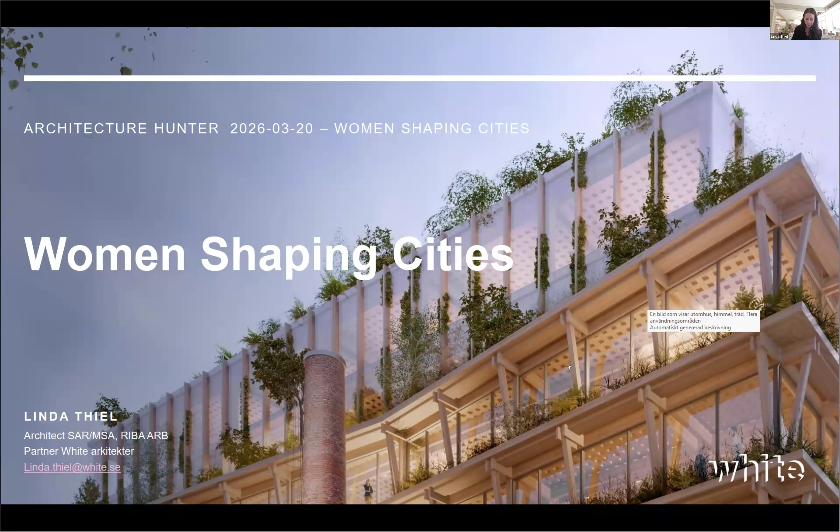So, as you already said, I'm Linda Thiel. I'm with White Architecture. I've been working as an architect for almost 25 plus years. I'll be talking a little bit about the Scandinavian approach to shaping cities through sustainable strategies, and how we can rethink urban neighborhoods and community-focused design. This will be through my lens as a woman and a mother. I'm of Swedish background.

I will come to some specific projects as well, but I'll start by introducing White Architecture. Our company was founded 75 years ago, and it's been spearheaded by community involvement and collaboration. Sidney White, who founded the company back in 1951, had the aim to improve society through architecture, and his legacy really lives through our ambition, taking that forward.

We are an employee-owned company with about 450 to 600 employees. The employee ownership really enables us to focus on collaboration and on how we see our profit should be spent. We do a lot of practice-based research through development and through our projects, and over the past 10 years, more than 300 employees have been involved across the whole spectrum, from curious beginners in research to fully fledged researchers. I think that really brings something to our practice as a whole and also boosts our projects.

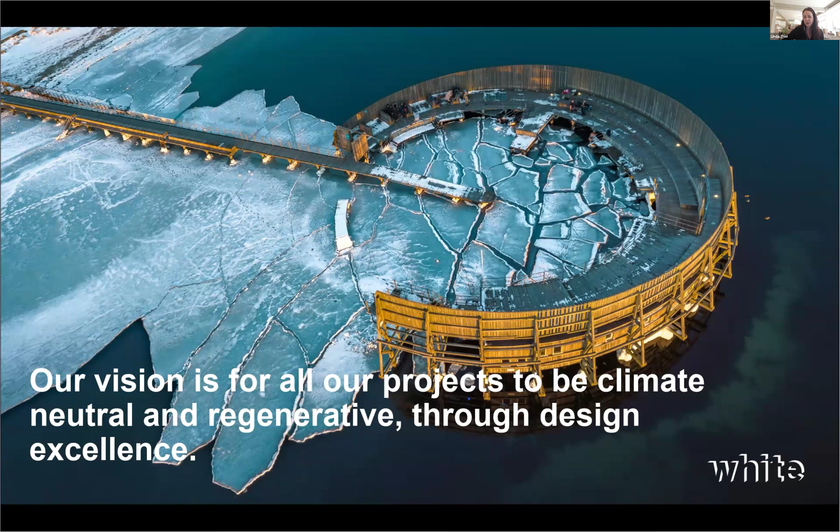I'm showing this image of a sea bath that a colleague of mine designed many years ago outside of Copenhagen, and it's a photo from this winter. It shows not only the closeness and access to nature that we're born with in Scandinavia, but also the challenges and the harshness of the climate that we're dealing with. That is something we have to acknowledge when we're designing, and I think it also impacts the way we live and how we actually share space.

So, design impact in relation to nature. 70% of Sweden's area is actually forest. We're kind of embraced with nature most of the time, and I think that also plays a role in how our cities have developed and how they're designed.

We also have what's called freedom to roam, which means the general public have the freedom to roam freely across nature and even past private land, as long as you keep away from the main buildings. Obviously you can't do whatever you want when you walk through the forest, but it's building on respect for both the forest and for the whole society and the people that we meet and that we work with.

So the last 10, 15 years, we've been working a lot with timber design across the company. This is due to circularity and biodiversity, but we also need to consider forestry. These are some images from last year's Biennale, when we had an exhibition on the fact that we do have a responsibility beyond the building site.

I'm not sure whether my toolboxes here are covering anything, but I'm sure it's fine.

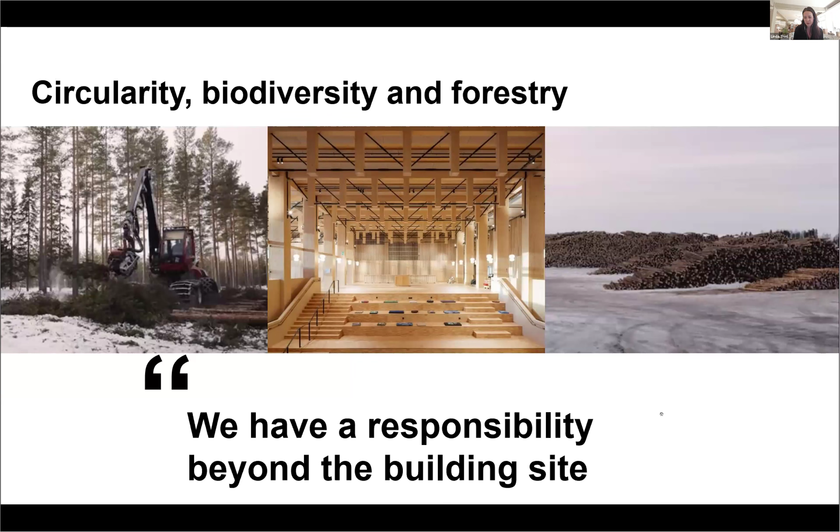The aspect of using timber is obviously good from a climate or carbon footprint point of view, but we also need to make sure that we manage our forestry accordingly so that we don't do any harm.

One thing that I work with a lot, and we do across the company, is rethinking urban neighborhoods. Not necessarily rethinking from scratch, but constantly evolving with society and culture, considering the context in different regions that we're working in.

We see this as reshaping cities or places where we can create healthier and more connected communities. This has an aspect on how we treat our shared spaces in terms of public realm, the thresholds between public and private, and also whether the buildings are the backdrop for public life to take place, rather than designing them as the key personalities in a neighborhood—which some of them obviously can be, and probably should be—but the main aspect of our societies and the way we live and relate to other people is in the public scenario.

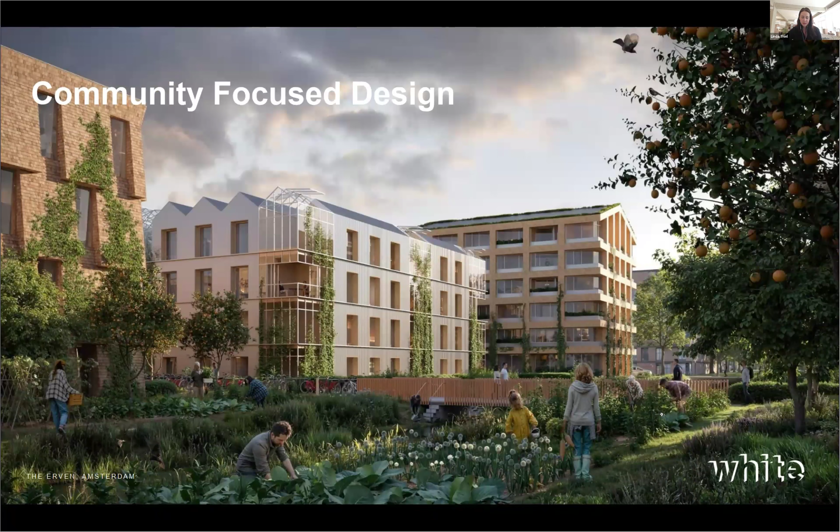In terms of community-focused design, this is an example from a competition we just won in the Netherlands, where how nature can actually benefit the community, and access to nature, if that is possible. Across Scandinavia and the Nordics, we're almost placing buildings in a humble way into nature, whereas in some regions we might need to create nature to be close to where we live and spend our time. This is also becoming more important in terms of managing both urban heat islands and stormwater, as the climate gets more volatile.

Do I take questions now, or do I just carry on and then we take questions after? You can carry on and then we'll do the questions when you're done with the presentation.

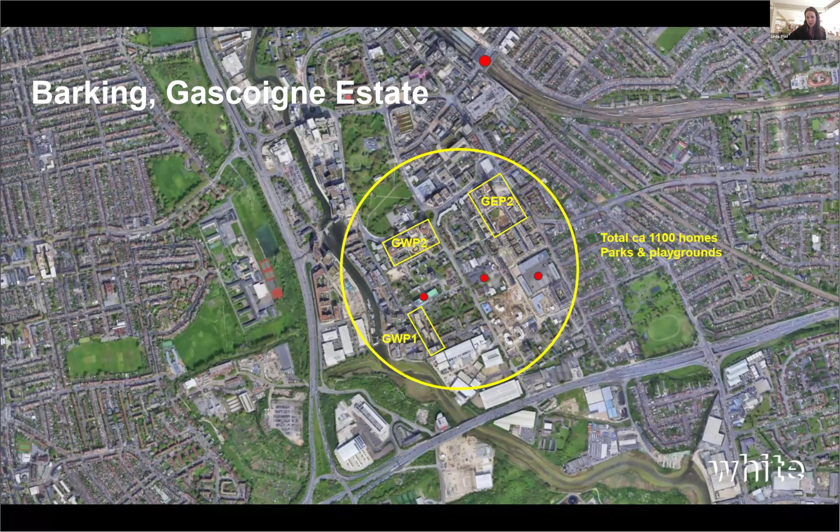So when I first came to Barking in 2018, this was the state of the place. It's an original 1960s estate with 12-story towers and 3-story linear apartment blocks. It was very open and difficult to navigate between buildings, with not many straight sight lines. As you can see, it was a lot of open space, but it wasn't very green.

The parts that were green were basic lawns, always fenced off and not much used. Even though everything felt very exposed with potential eyes on the street, it didn't feel very safe because it was difficult to navigate. There were long distances between smaller shops that could have felt like safe havens.

So our approach was to fundamentally rethink the whole landscape and public realm approach. Another thing worth highlighting is that Barking, and specifically Gascoigne Estate, measured across London, has some of the lowest life expectancies, health problems across the community, some of the lowest incomes, very high unemployment, and a very long waiting list for social housing.

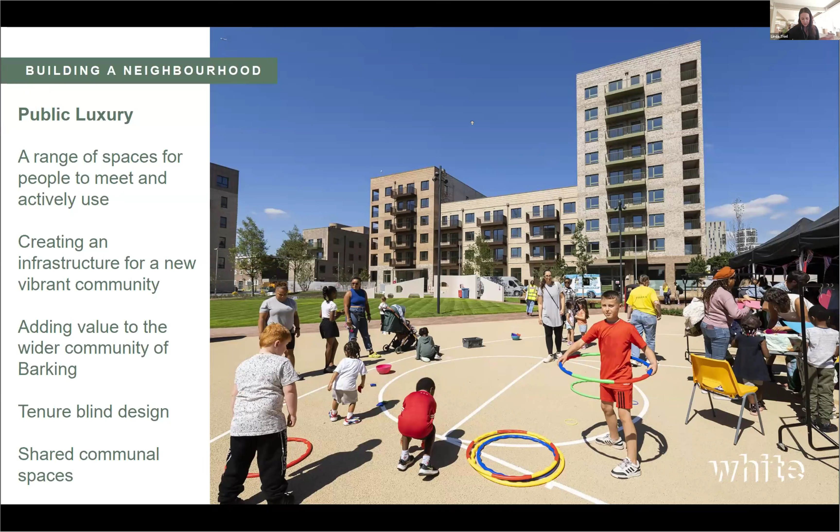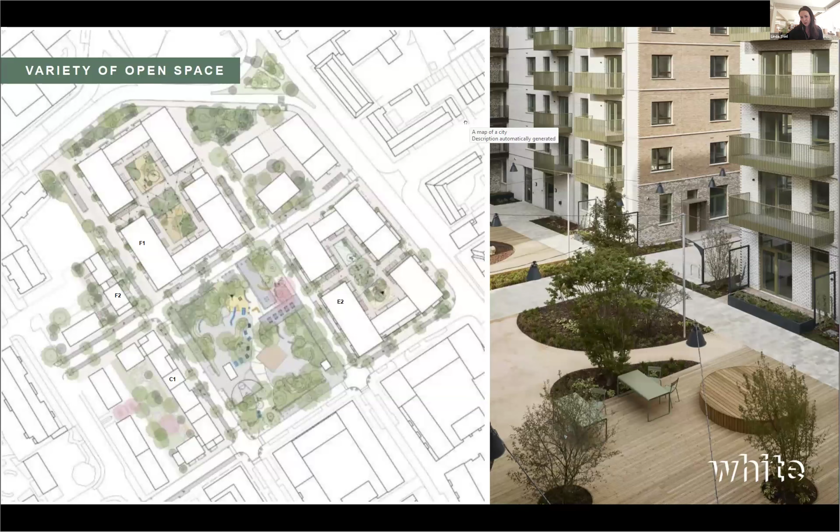The site plan on the left also shows the two major courtyard blocks and the way that we cut them open so that you're able to see through. That was something that was really well perceived in terms of not just being in a fully enclosed space. You can see on the image on the right that gap between the buildings where you can then access the street. It also divides the courtyard into two or three smaller spaces, which was quite successful in terms of use when there's high demand on using them.

Here's another image of the same courtyard, and we're working with a variety of large balconies or deck access solutions for these homes, predominantly having larger homes on the ground floor. You can also see how some of these outdoor gardens on the ground floor units connect straight out to the courtyard.

One thing was that we were trying to enforce a wider palette of colors. That was also something that the community really was striving for and said would be a positive addition to the whole site.

We also added a lot more trees and greenery. There were a few really nice mature trees on the site, which we could save many of, but not all. The nature contribution to this project is that it's planted almost 200 trees.

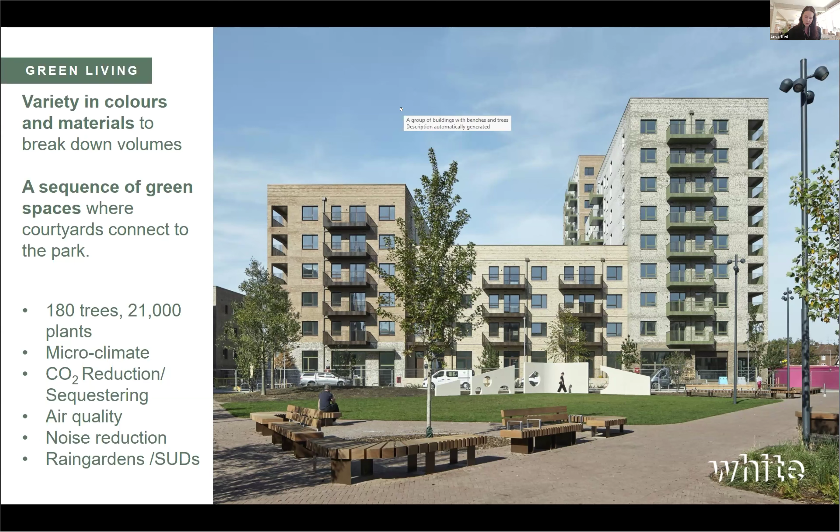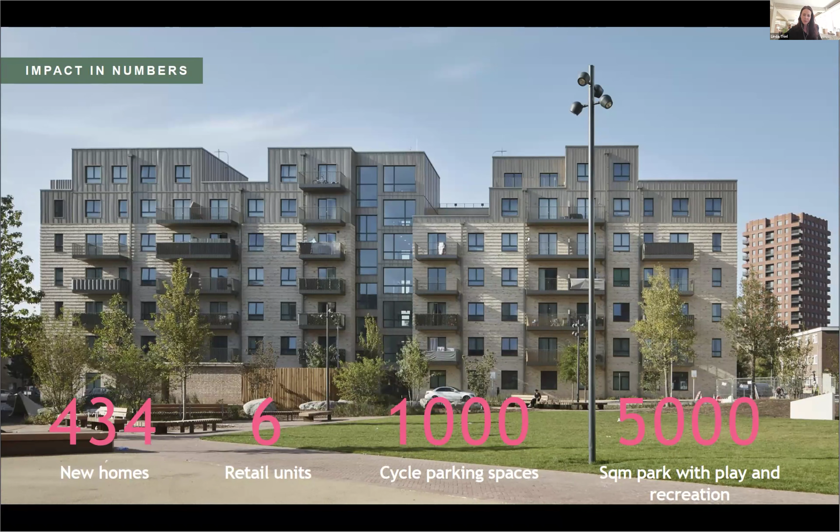I'm not sure whether you can see the text on the bottom here, but some of the aspects here are a lot of cycle parking spaces, the big park that you've seen images from, and quite a lot of new homes. This building that you see in this image is providing some of the London affordable rent homes. But we were very cautious to make sure that there was no difference between private and affordable homes.

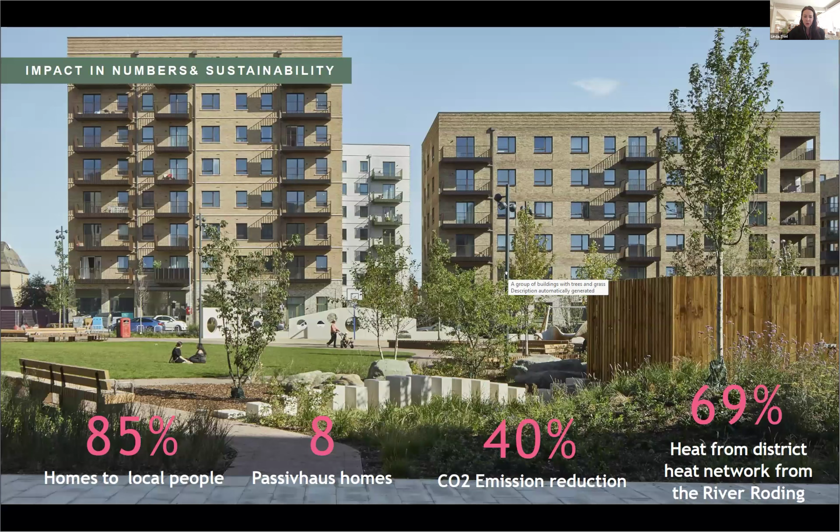And 85% of these homes in this phase went to local people, with some Passivhaus homes as well. And we were able to reduce our CO2 emissions quite substantially.

One part of working in London, which is different from Sweden, not sure how it is in other parts of the world, but the teams across the wider disciplines had 1,400 hours of supporting employment for locals and 190 volunteering days.

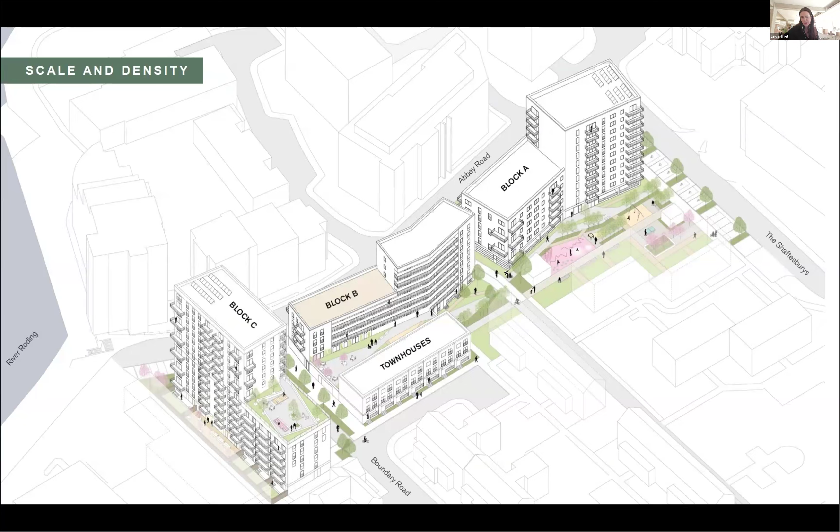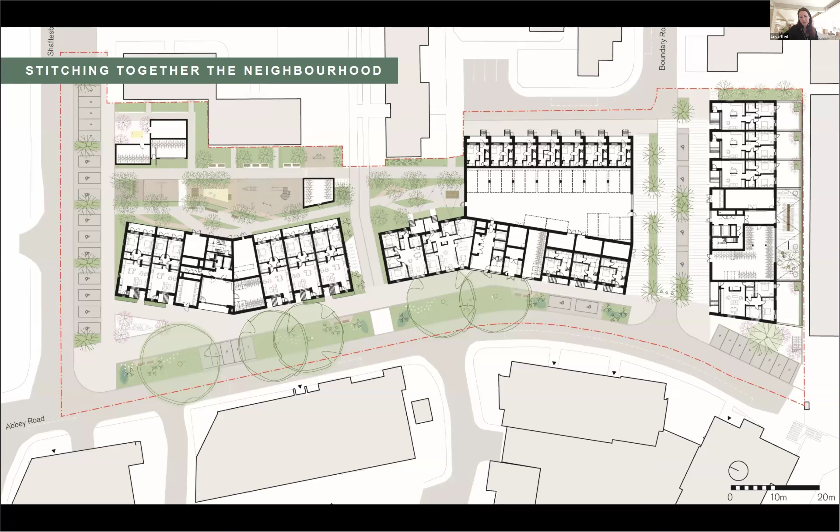So that was why these blocks were shaped with kinks, to embrace these existing trees and create some playground on the back. This is a ground floor site plan, so we had quite a lot of homes on the ground floor because this site sits to the further south of the estate, quite far away from the station. If you're walking home from the station, it takes about 15 minutes. It was quite critical to create true eyes on the street when you come down to this area, so that you felt some safety aspect in terms of that overlooking aspect.

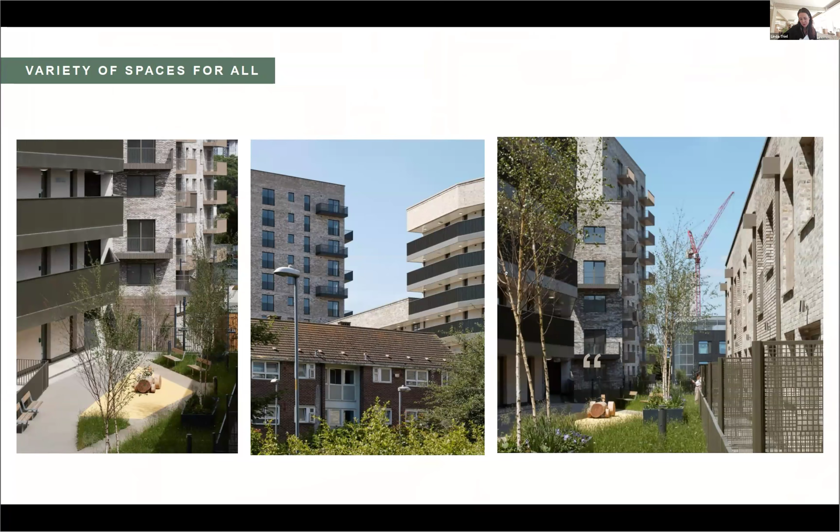We also created smaller pockets of play and green so that you could get really close to that right in front of your home.

The last phase that we worked on was really embracing everything that we had been through with the other two. We had achieved a real understanding of where the London affordable rent homes would need to go and how to shape taller elements. We also worked really hard on the threshold between your private front door and the fully public realm or playgrounds, that shift in between, in terms of some green buffer zones, some steps, to create clarity in the public realm in terms of that public-private shift.

This place was also in a very poor state, and we created these connecting pedestrian routes with green buffers for rainwater collection, seating, and courtyards that really embraced the fact that you would have a private outdoor place, but also a playground for smaller children.

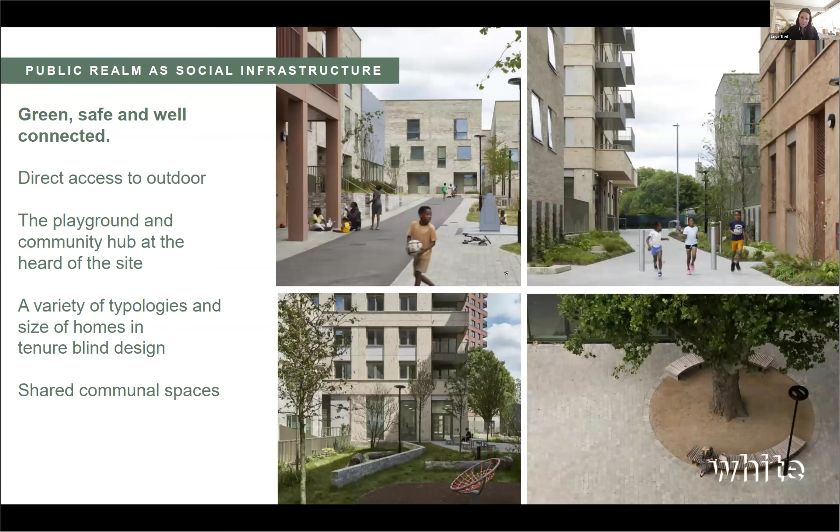And I think this was also the fact that we wanted to create something that felt green and sustainable. It had to be produced really fast because there was this urgent need to get more homes provided for people on the waiting list.

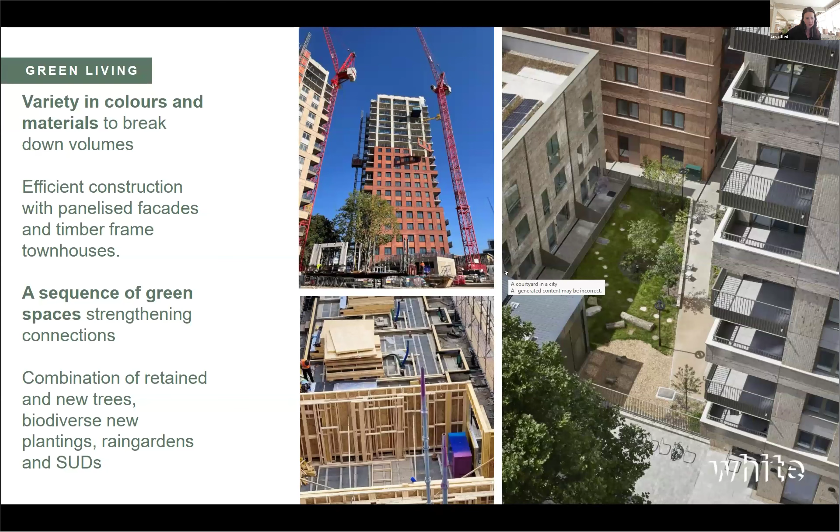But also create the visibility, being able to see through these courtyards, even if, in this case, they were fenced off.

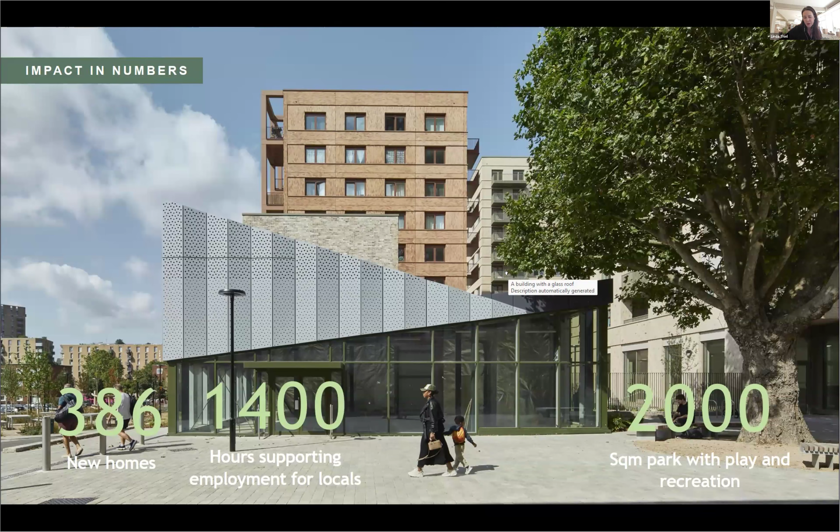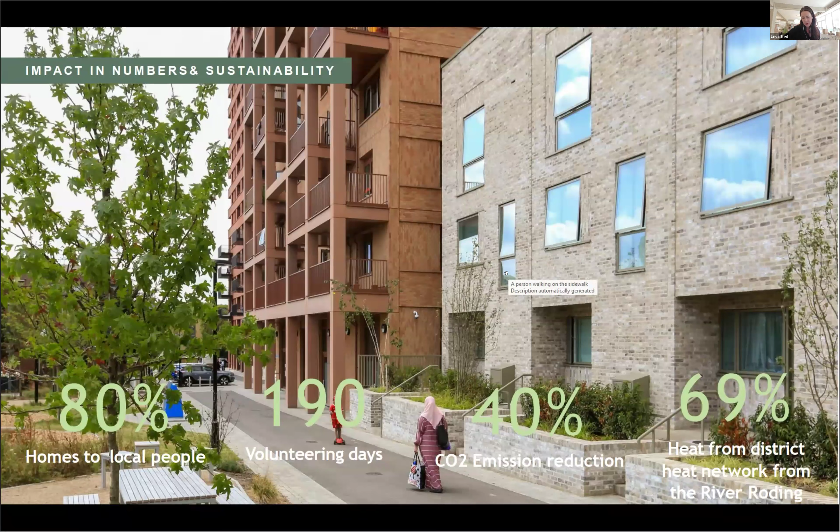And it also includes a community hub that can be used by the community and the local authority for different things. This is showing some of those elements, managing the threshold between the private and the public in terms of these buffer zones.

And along a view from one of the major parks. This was also very much a conversation between us, the planners, and the local community. The local community wanted more color, and they wanted the taller elements or towers to be similar but also different, so they could be easily recognized.

I just wanted to, since I've been speaking for quite some time, finish off on some thoughts about shaping organizational spaces through leadership, and how I think both as a Swede or Scandinavian, I do that slightly from a different perspective, but also in terms of being a woman in the industry, shaping not only the built environment, but also the professional ecosystem around it.

I think having had the fortune and being privileged enough to work while raising two children, doing lots of things and working on an international market, it's really important to show that it is possible as a woman to do that.

I always try to mentor everyone in the office, but I try to focus on younger women who are actually wondering, how am I going to develop in my profession? Do I need to take a lot of time off to raise my children? I always say that family comes first, but I think you also need to nurture your professional development.

Perfect, okay. So I would like to start by introducing myself and where my journey in architecture started. I'm an architect originally from Chile, and this is where I was shaped as an architect, surrounded by the amazing geography of my country, and also inspired by the handcraft and art that was present there. I then came to London to study at the Architectural Association—I wanted to experiment in design, and it was my aim to go a little bit beyond what I learned in Chile.

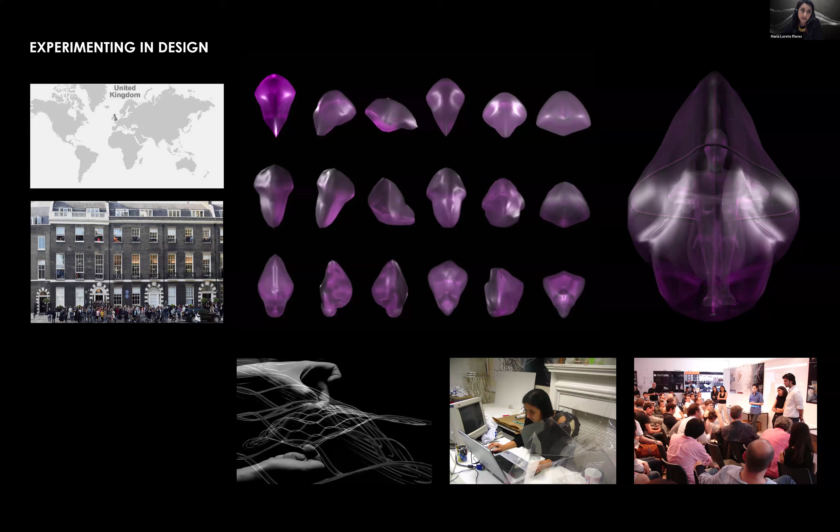So I joined the design research lab at the Architectural Association, where I had the opportunity to work in groups and have Patrick Schumacher and also Zaha Hadid as part of our teachers. That, of course, led me to work at the company I joined in 2006—19, 20 years already—where I've had the privilege to see the evolution from the early projects and the geometry that was identifying Zaha at that time in the 2000s, until now, when we became a global company of more than 500 people, 50 nationalities, and 45 languages.

So it's really a very diverse place to work. We work across the globe in all typologies and at different scales. We're based in London, where we have our headquarters, but we have satellite offices in Beijing, Shenzhen, and Hong Kong, where most of our projects are based, and also a small office in Berlin.

The most amazing thing for me as a young architect joining this place was the idea of working with a multidisciplinary team, where I could somehow understand how all these projects that I saw when I was a student in the magazines were really built.

Currently, we have more than 95 projects built in our portfolio and also 36 that are under construction in different parts of the world. Some of them are shown in this image, spanning from master plans to museums, to stadiums, to residential projects and other infrastructure.

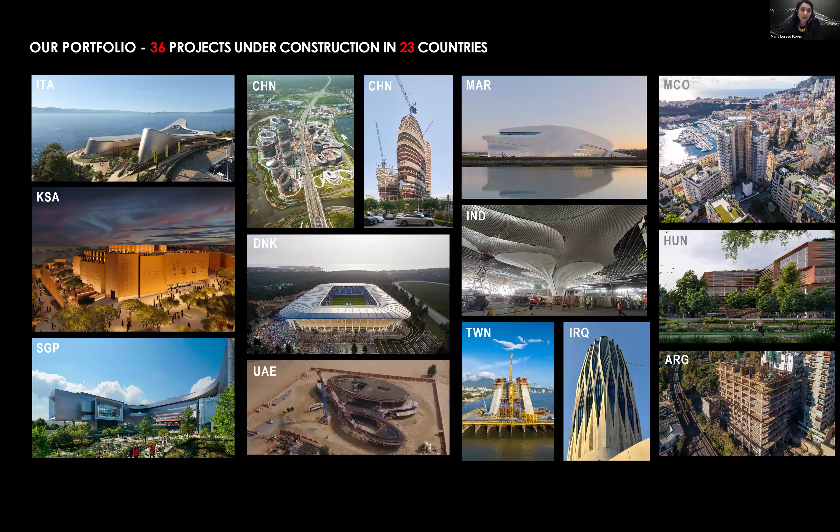Yeah, this one, I think it came before. So the main thing for me during these 20 years, and the way that it shaped who I am as an architect and also the way that we do architecture, is this evolution that we experienced in terms of geometries and also in terms of new tools.

At the very beginning, the work of Zaha Hadid was mainly related to art. It came from the expression of Russian constructivism into these graphic spaces that are the images you see on top, working with analog models, relief models, resin models, to the current projects we have that are done in a parametric way and designed with softer geometries. So there is a matter of time, there is development of tools, but there is also the work of a company that is always trying to go beyond the traditional and push the boundaries of architecture.

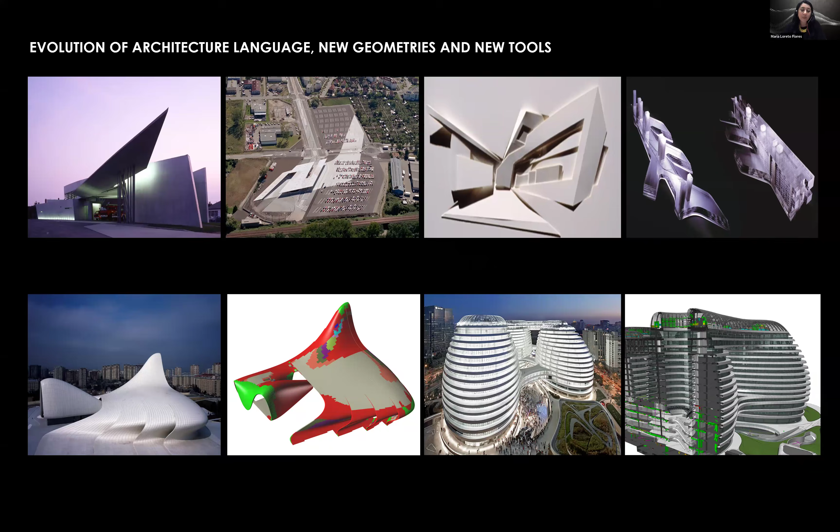So this is one of the first projects I worked on. It's a very different environment from what you could see now. This is Pierre Vives in Montpellier, France.

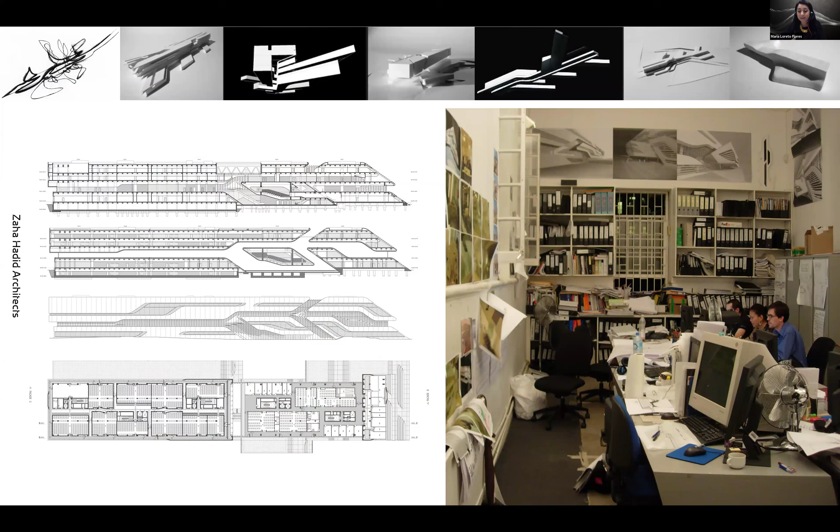You see this as a studio where things are happening, a project that was mainly done through models, as you see in the upper part, sketches, but also through sections and plans, which was a way to understand diagrams mainly. But then that was extrapolated to the three-dimensionality of the spaces and how we imagined these very monolithic pieces at that time to create and shape these spaces.

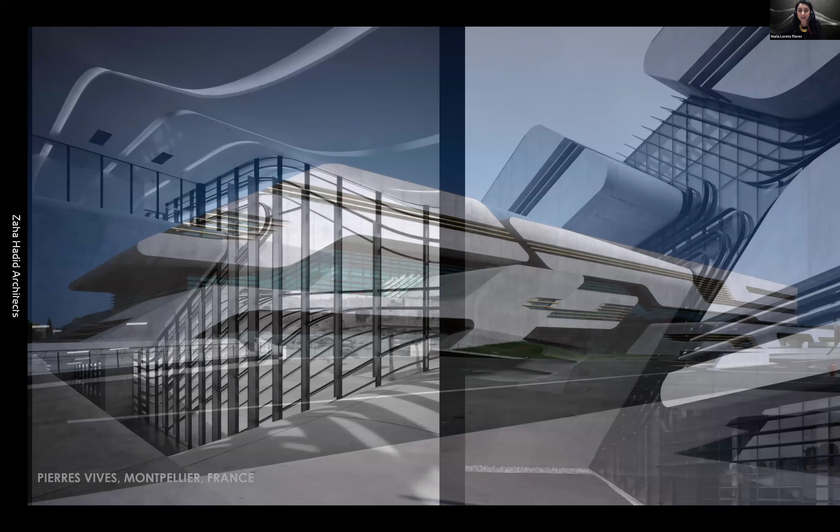And this is how the building looks now, already more than 10 years later.

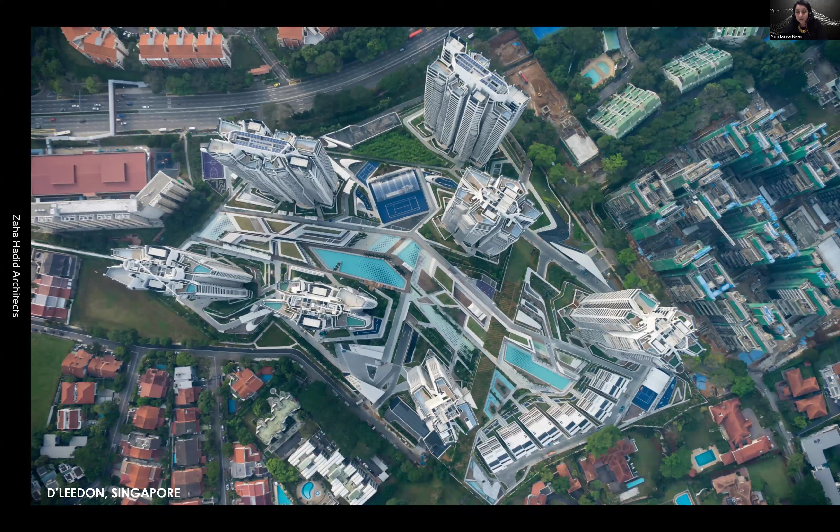Understanding that, I moved to a different part of the world. This was in Singapore, a different program. And the first commercial project we did, back in 2007, was D'Leedon in Singapore, a residential complex of 7 towers and 12 villas, where we first experienced what it was to design in a generative way.

So we wanted to create this series of towers that were not the shapes that you extrude traditionally as towers, but we wanted them to blend more with the vegetation that is part of the main characteristics of the site, and be this type of flower.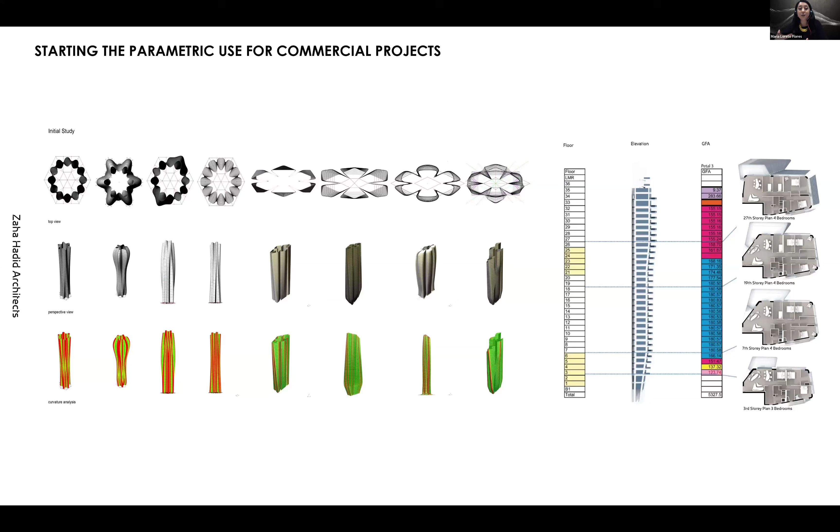But for that, we created a problem in terms of the areas, because of course, being a commercial project, the client wanted specific areas, a specific number of flats, which we had to negotiate. So this is where we started thinking that some of the digital tools we were working with would help us shape and create the movement in these towers that we wanted to achieve.

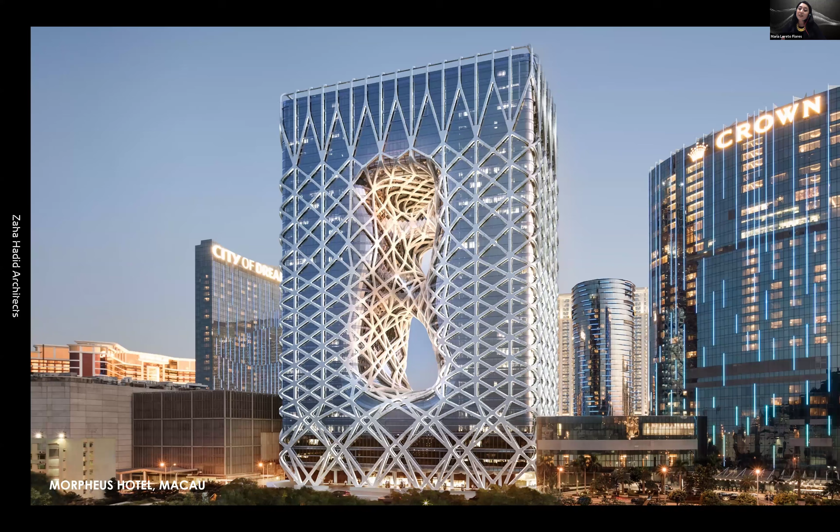After that, as we said, the evolution of the tool helped us to shape other types of spaces that we didn't think were possible when we were doing the first project. This is the Morpheus Hotel in Macau.

That is the first hotel with a metallic exoskeleton, in this case, that allows the internal space not to have columns. So this exoskeleton is connected through the slabs just to the cores, also creating a very symbolic building for the area of Macau.

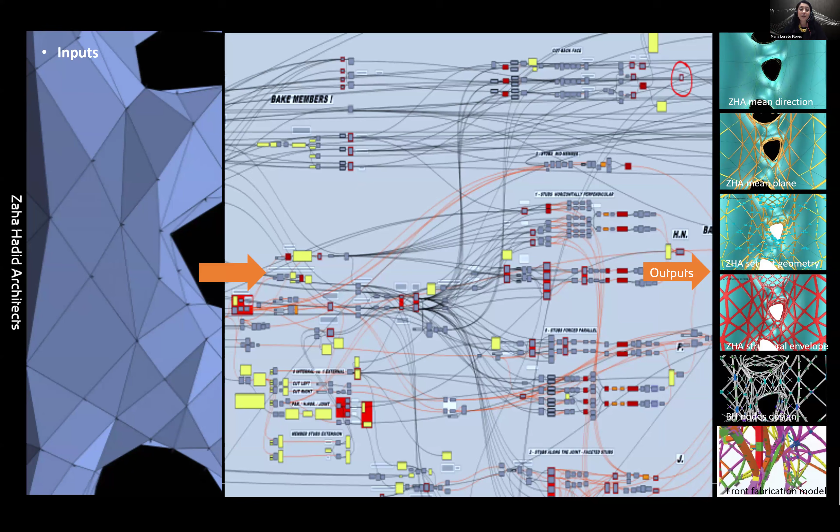This was a project that the client envisioned as a love letter for the city, also creating a space that was completely unexpected. The generation of this project was a digital collaboration between architects, engineers, and also the manufacturers. There is a definition of surfaces, of structural members that needed to be all rendered together to produce this amazing structure, but also the cladding and the glass facade.

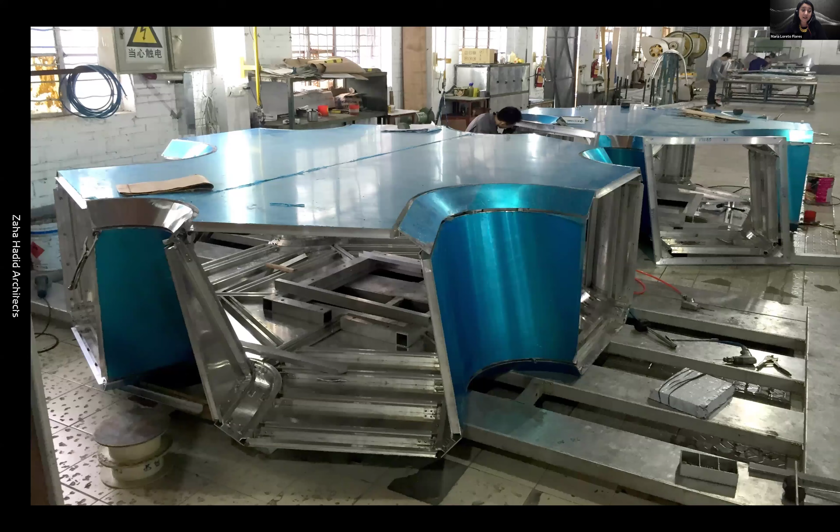The structure is as beautiful as the final result. The pieces are huge in terms of size. You can see the size of a person there working, and it creates a big challenge to produce something that looks very strong in terms of structure, but becomes a jewel in the interior of the building, where you can see through all these spaces that, as I was saying at the beginning, were completely unexpected and create a different journey in the interior of this building.

All these projects have a rationale behind them. I always like to say that, of course, what we see in the magazines and in social media are beautiful projects, but they are not random design.

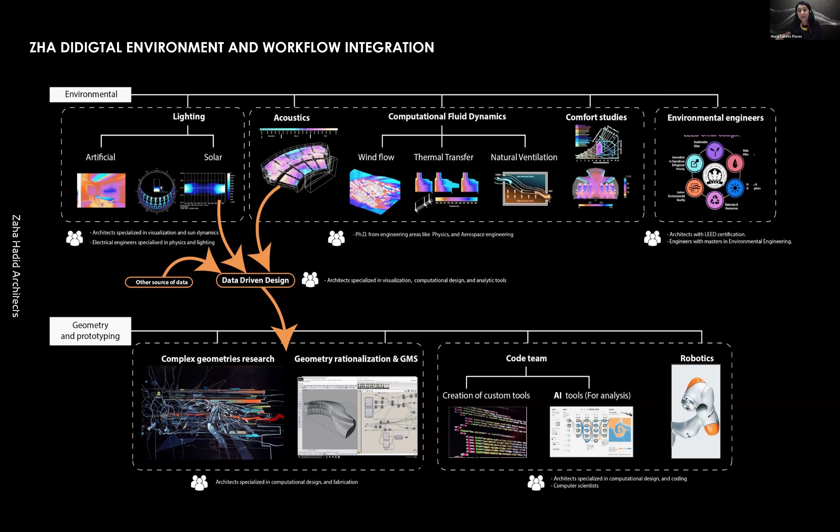They are all supported by a rational logic, by mathematics, by the work with the engineers, and also the work with the manufacturers. We do have in-house different teams that help us address items like rationalization of geometries for building facades and fabricating different pieces, but also teams that work with us in terms of energy, environment, and sustainability.

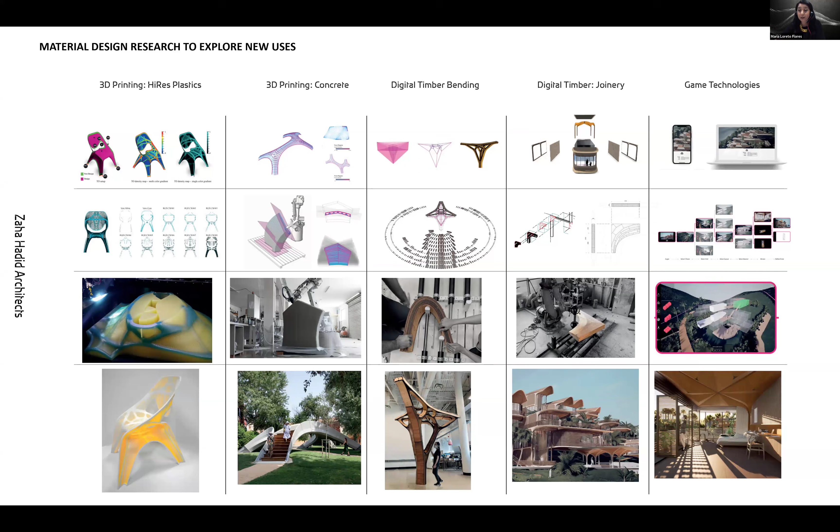So all this research is applied always in pieces or in products, in pavilions that are done in collaboration with educational institutions, but also with manufacturers, and then they become part of the building. We think that feedback, that exchange of knowledge, is also very important to keep us updated and in the forefront of what we are doing.

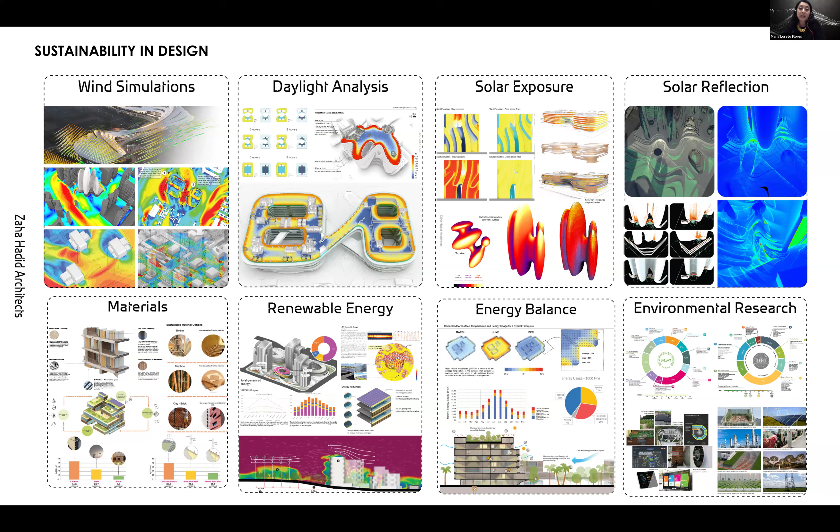In terms of sustainability, we also have an in-house team that helps us from the very beginning of a project or competition to understand the location we are in and how the geometry we are proposing needs to be adapted in terms of solar exposure, predominant winds, the energy we can get from the building and from the site, and the type of materiality available in the context.

In terms of the latest projects we are doing, I think one of the most interesting topics is the generation of cities. There are a lot of countries generating, revitalizing, but also creating new areas of the city. Most of them are what we call smart cities or smart districts, which are pieces or areas of the city that need to work in integration with different programs, but also with the environment.

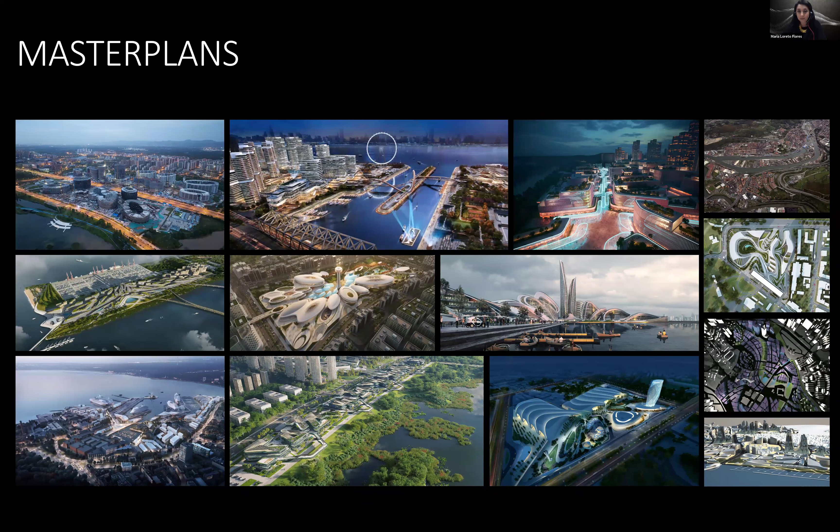Some of these examples are really interesting in terms of how they are generated. This is also fertile ground for us to experiment and understand how our design can be implemented at different scales, but also how we can generate different digital tools that help us to do so.

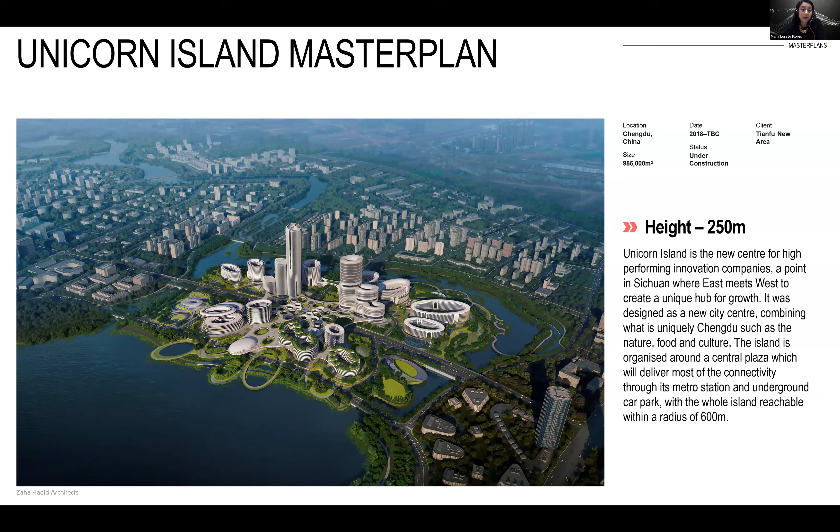We have, for example, this master plan in China, in the city of Chengdu. This is called Unicorn Island, and it's the conglomeration of different startups, different unicorn enterprises, located in an area with a very important presence of biodiversity. Therefore, the landscape around all these cells is also very important. This is currently in construction, as you can see in some of these images. And there is also this idea of generating public spaces and urban connections between all these buildings.

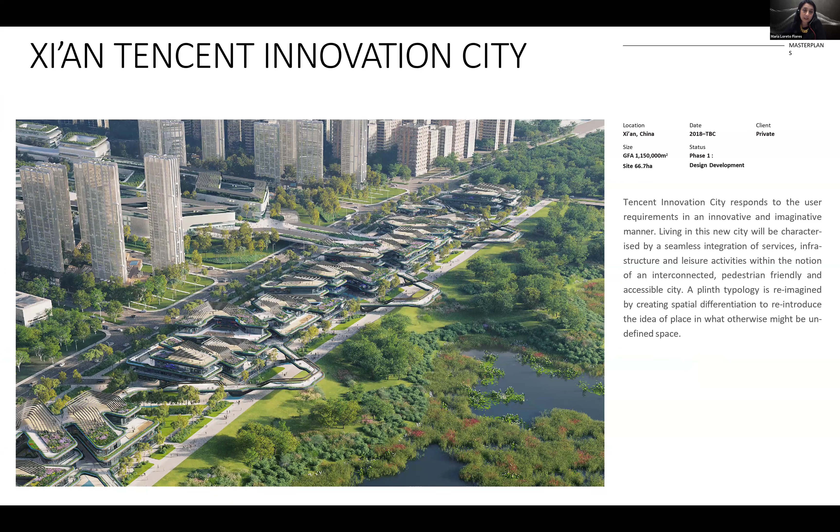The next one is the Xi'an Tencent Innovation City. This master plan has a very strong connection with nature, with this river next to it, creating pedestrian viewing points that connect back to the volumes. So even though it's a very technological approach to this new district, working with the idea of navigating through digital tools and getting some type of smart mobility, it's also very strong in the idea of connecting with nature.

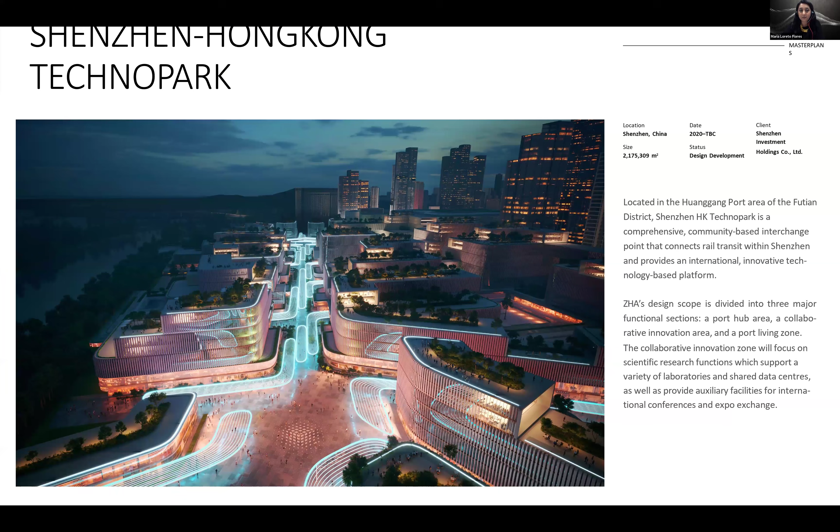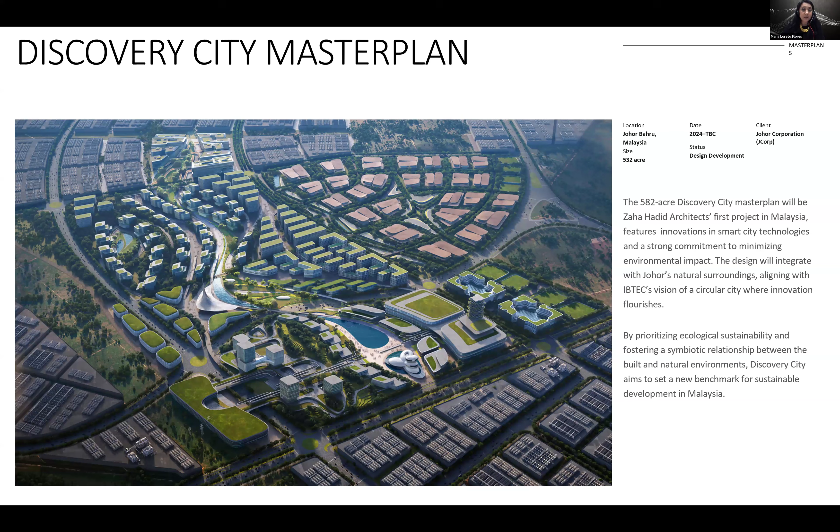Same thing in the Shenzhen Hong Kong Technopark, which is revitalizing part of the waterfront of Shenzhen with this very massive public space. As we said, for us what's important is that in these new areas of the city we need a mix of use and a mix of users as well, so the city grows organically, is resilient, and is able to change over time—for example, plots designed for light industry could later be used for educational institutions, universities, and so on.

This is another example in Malaysia. This is an innovation city as well, with a lot of integration of vegetation because of the conditions of the site. This is another example where the creation of this urban park is very important.

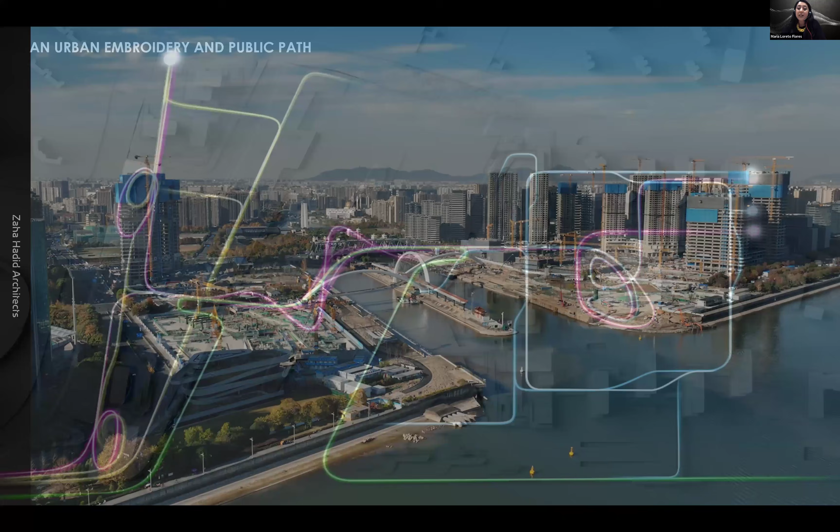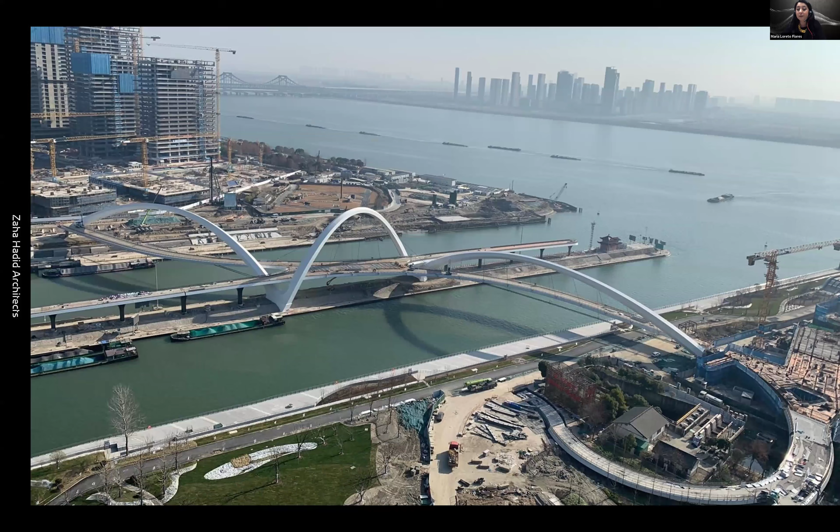So the idea in this case is to be inspired by the rich tradition of embroidery, silk embroidery of the city, creating all these pedestrian paths that connect back to the city through this pedestrian bridge—a kind of ribbon crossing from one side to the other.

In terms of sustainability, our projects are also addressing many issues according to the context where we are. And I think that instead of being a problem, they are becoming really design features.

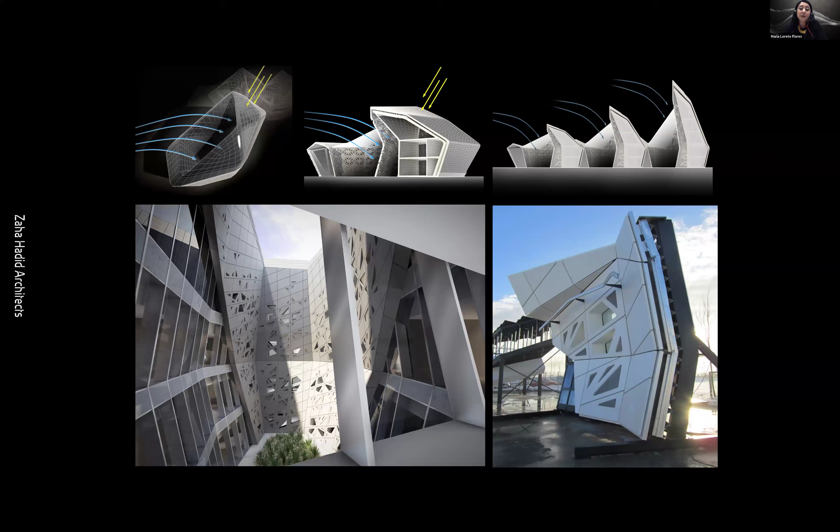This is the case of the KAPSARC petroleum studies in Riyadh. This is a research center designed as a series of cells in the middle of the desert. These cells are all oriented and shaped so they get the best of the predominant wind, scooping it in to generate ventilation and creating internal courtyards that allow shadows and people to be in these intermediate spaces.

The use of material in an innovative way is also one of our concerns. This is the auditorium of the Heydar Aliyev Center in Baku, done completely in timber. In this case, we are getting away from our traditional materials and working with something that until now we were not using much in our projects.

That's why we decided also to propose this stadium in the city of Stroud in the UK, completely in timber, in the middle of this master plan that has a very ecological approach.

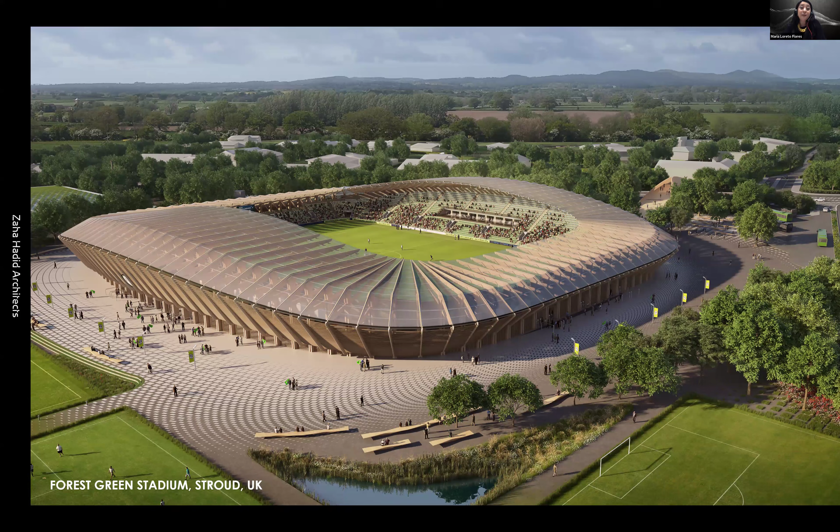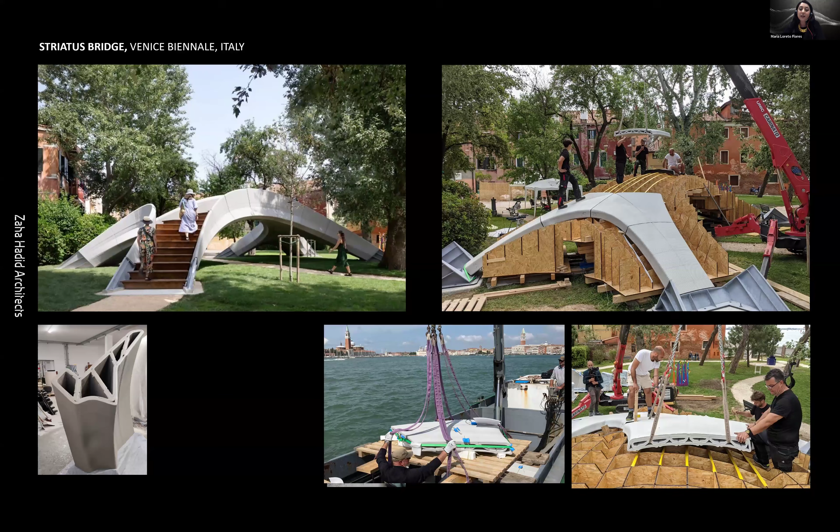This is also a really good example of how the research gets applied. In this case, we are going a step forward, thinking about how to print with concrete. So this is a bridge that we created for the Venice Biennale in 2021.

The idea was to use materials in a way that they could also be assembled and disassembled, but as well reused or recycled later on. So in this case, we have the concrete, the timber, and then the metallic structure, all separate so they can be reused. And these pieces in concrete were printed from liquid concrete.

Another typology is what we call the vertical hubs. Going vertical, there are a series of towers, all showing a mix of programs, generally having podiums that are given to the city as part of the urban space, but also creating unexpected and memorable experiences inside, like this one, the Leeza SOHO Tower.

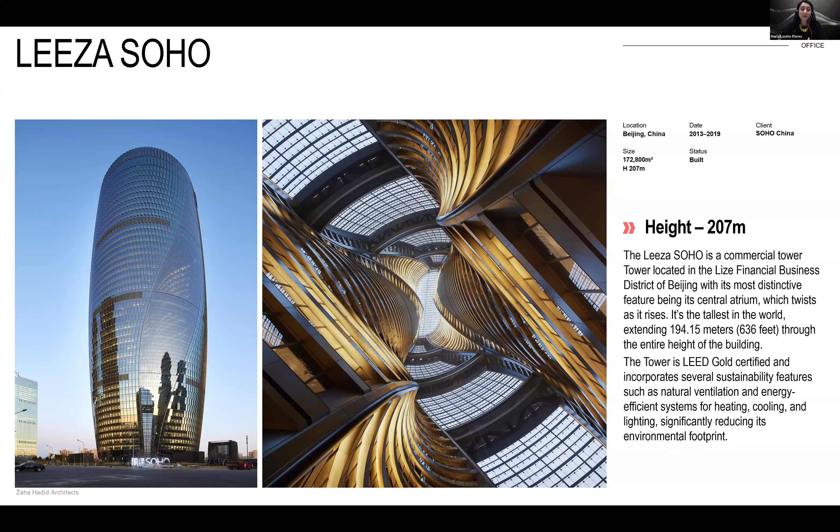Leeza SOHO Tower has the tallest atrium in the world, a 200-meter atrium, and this is not something that we did because we wanted to. It came from a problem. In this case, the site that the client got was crossed by a metro line, and therefore we couldn't put the foundations of the building in the center, so we had to split it, and that created these two towers separated by this void. So instead of being a problem, the situation of the site became actually the main feature of the building.

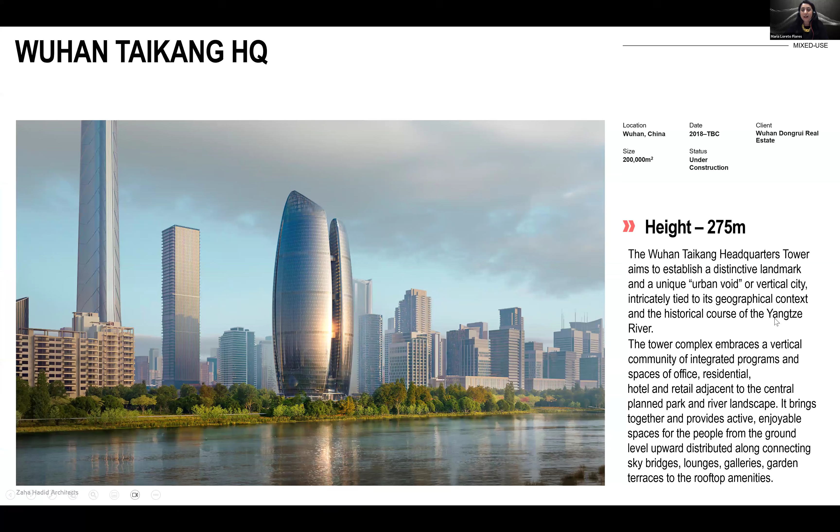A similar case is these two towers connected by a kind of spiraling space in the center, in Wuhan, getting inside the tower, all the urban functions—commercial, mixing with some education, going up into residential and one office tower.

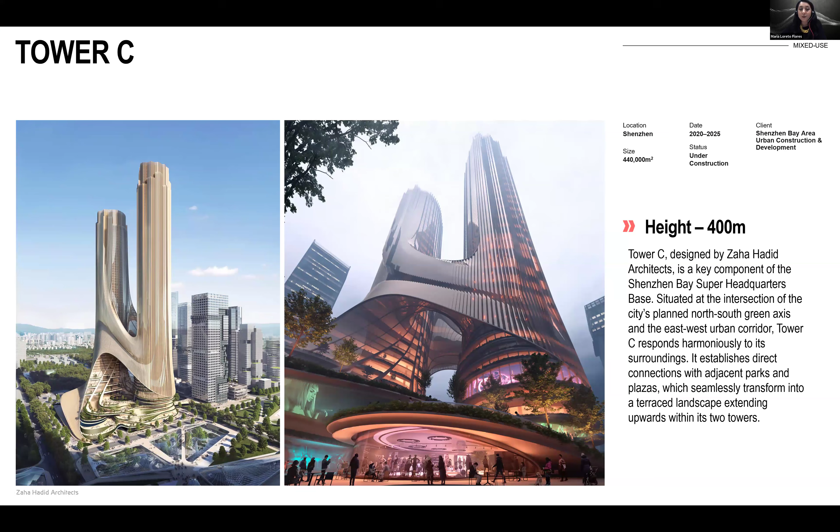And another example, also in Shenzhen, the Tower C, which is these twin towers that are joined in the podium area, and then they are bringing up all the landscape to these bridges that are again connecting and making the towers not just isolated elements, but also part of the negotiation with the ground floor.

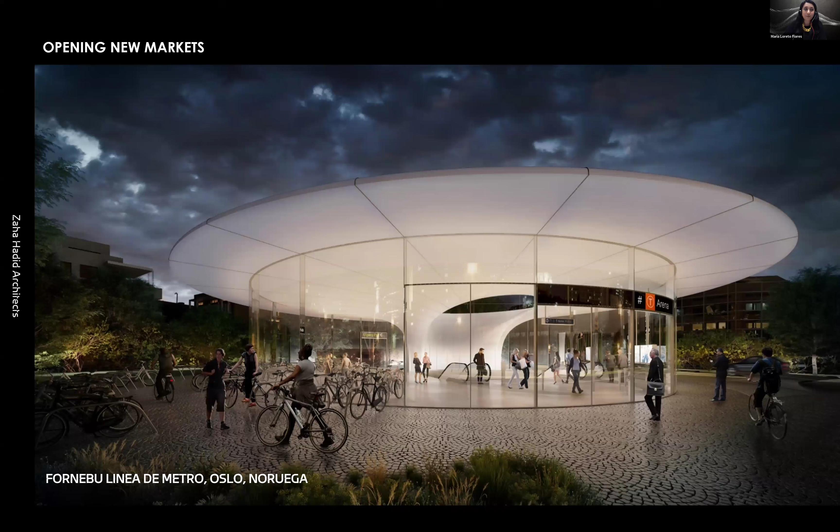We are also opening new markets and working in a different scale and in different contexts in Scandinavia. These are some of the projects that we have been developing. For example, this one in Norway is the exit of the metro station Fornebu.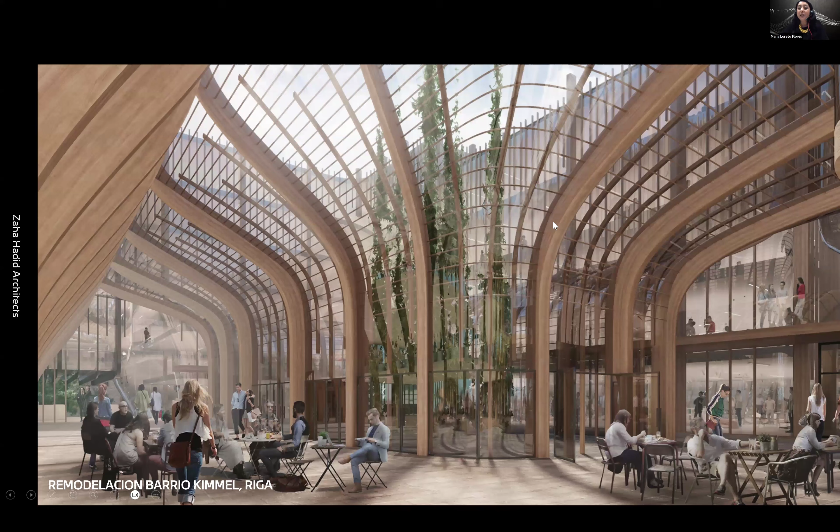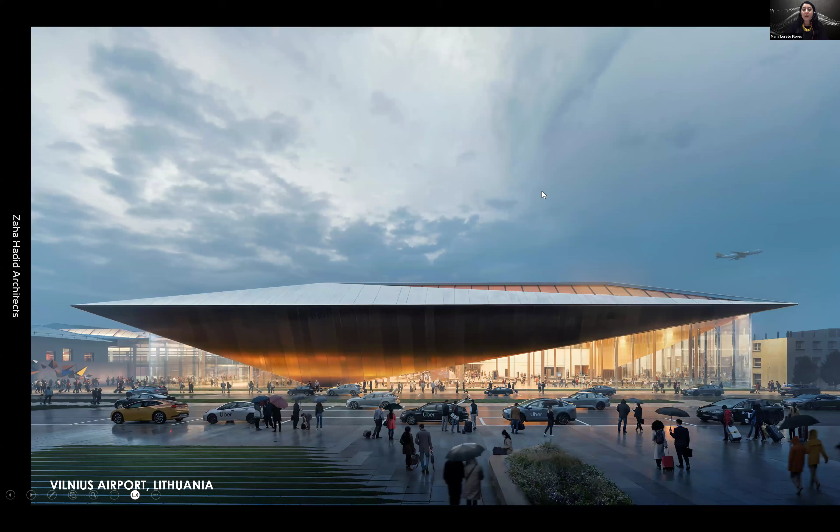Some interiors for a tower created in Riga that is also using timber, and the stadium in Aarhus in Denmark, which is a smaller stadium contained within a forest and a green area, and then the Vilnius airport in Lithuania. So these projects, as we can see, have a different scale and a different language than the ones we see in China or in the Middle East, but they are trying to answer to their context and develop a different language for that.

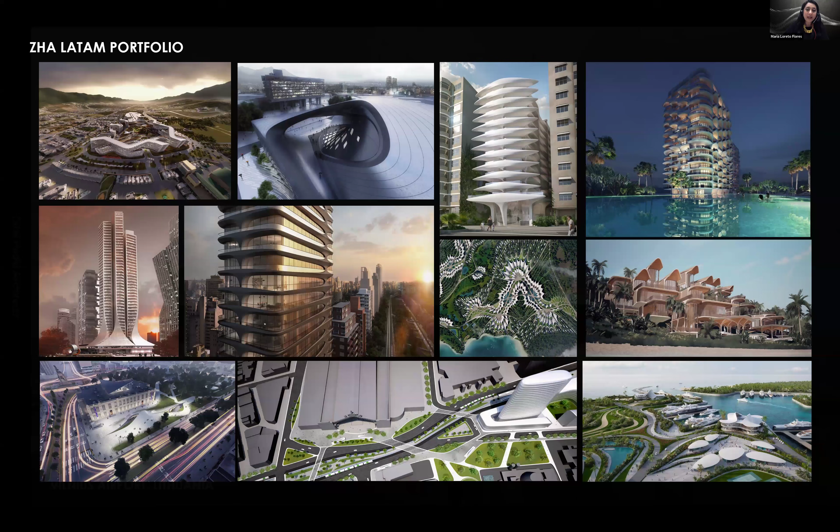This is, of course, very important for me to show as well, because it's my region of the world. I think it's also interesting to think about the language we can develop in new territories and new areas, like Latin America.

These are some of the projects in our portfolio. Some are more than 10 years old, but I'd like to show the latest one, L'Avenue Tower in Buenos Aires. This tower is now dominating the skyline of the capital of Argentina. It was developed in terms of design by us, but in strong connection with local partners, local architects, and local engineers, and it also shows how it's possible to develop different materials locally.

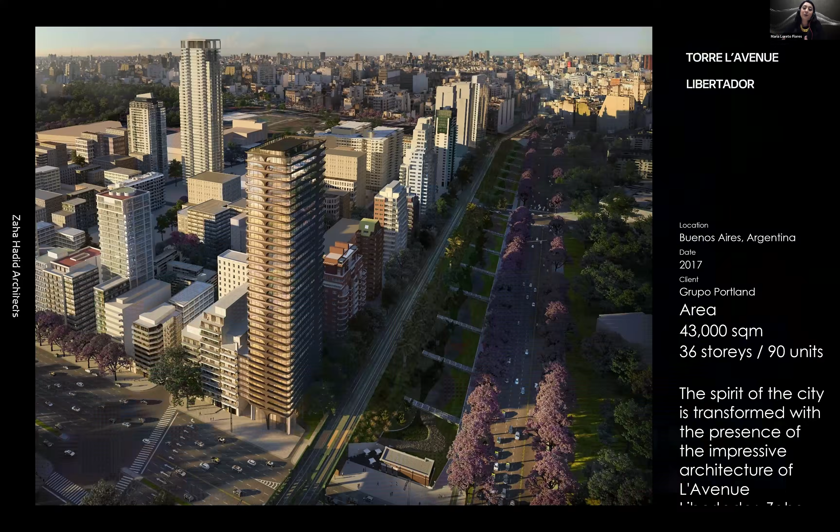When we proposed the facade for this project, we wanted to use a material that was not available in the region. We looked for it and tried to partner with companies until we found one in Cordoba, Argentina, producing ceramics that was able to replicate the material for the whole tower. That, for us, is a virtuous cycle, because we learn from the local context but also exchange knowledge, not only with the team working with us on the project, but with manufacturers who are now able to work with any other international architect producing this type of project.

So this is my journey shaping spaces as an architect, with almost 20 years of experience, as I'm showing from the early projects at Zaha until the projects we do now, expanding and working, as a privilege, in different parts of the world, being able to know different cultures and the way people work.

In parallel, I am part of the strategic board of Women in Architecture UK. This is a group that started in 1999 as part of the RIBA Architects Group for Change, mainly addressing the problems that minorities and women had at that time. I have to say, honestly, the problems are still the same. I think, as the previous panelist mentioned, things haven't changed much, but now that we know what the problems are, we have to take more action.